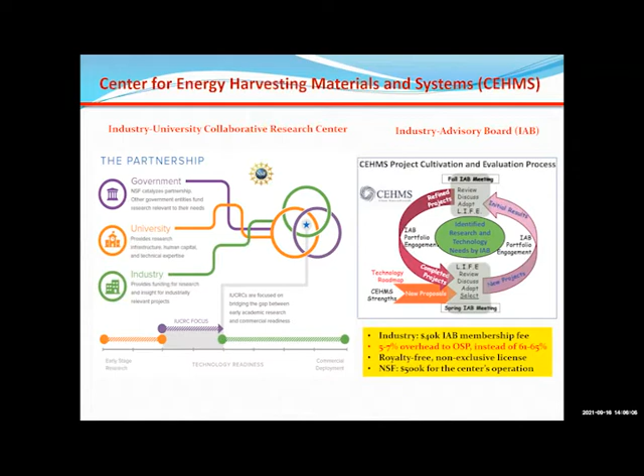Basically, the NSF gave us the operation budget, then we get money from industry, so the university reduces overhead. About my research, I work on energy harvesting from different scales.

Energy harvesting is really applied research, so the knowledge you use includes vibration, dynamics, control, electronics, thermal fluid, and smart materials in sensors.

Today I'm going to talk about energy harvesting from vehicles, transportation, and ocean, used for the transportation system.

First I'll talk about small scale energy harvesting, usually at the milliwatt or microwatt level. I'll give one example about smart tire energy harvesting. Then I'll talk about energy harvesting from vehicles, at the 100 watts energy level.

Then I'll talk about transportation infrastructure energy harvesting, specifically railway track energy harvesting and speed bumps. Then I'll talk about ocean energy harvesting, and finally give my conclusion.

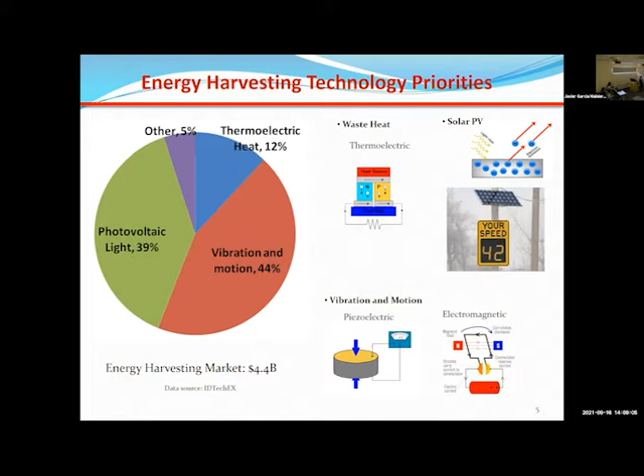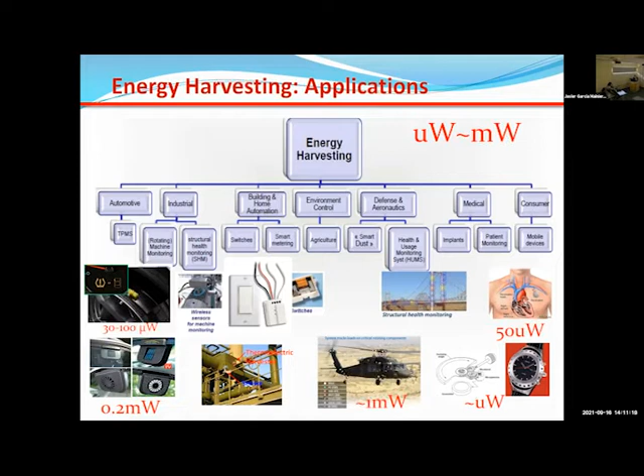This is 100 microwatts or less, right? Like the watch is microwatts energy. Those are the micro milliwatts energy. So that's energy harvesting, the principle.

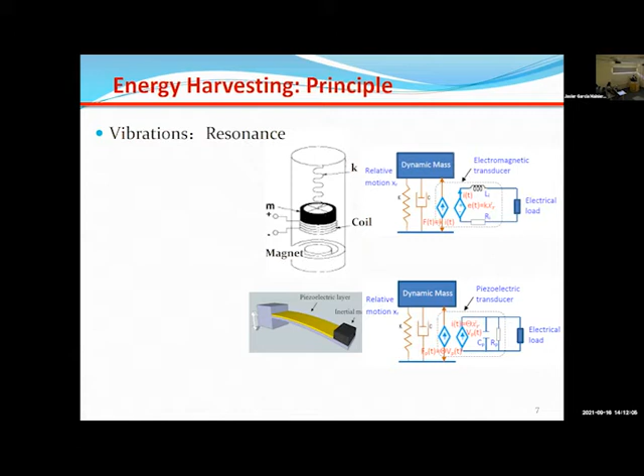Take a look at these two most popular types: electromagnetic and piezoelectric. No matter what, there's a vibration mass. And then there's vibration, and you can model this mechanical vibration with the voice coil or piezoelectric. It generates a voltage or current through this piezoelectric or electromagnetic transducer, and then you get energy out directly. This is the modeling for piezoelectric and electromagnetic energy harvesting.

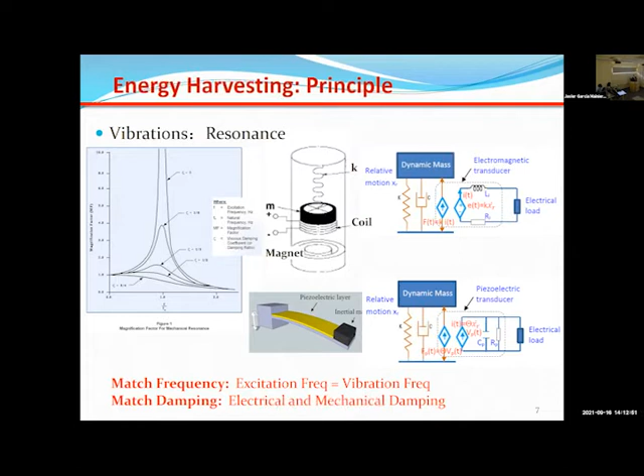And essentially you use resonance. The condition is here: you need two conditions so that you can get energy out. First, you have frequency match. When the system works at resonance, you have maximum vibration amplitude, so you get more power output. Second is damping matching. You need to design the power electronic circuit so that when you charge the system, you introduce damping. The electric damping, or energy harvesting damping, should match the mechanical damping. In that way, you get maximum power output.

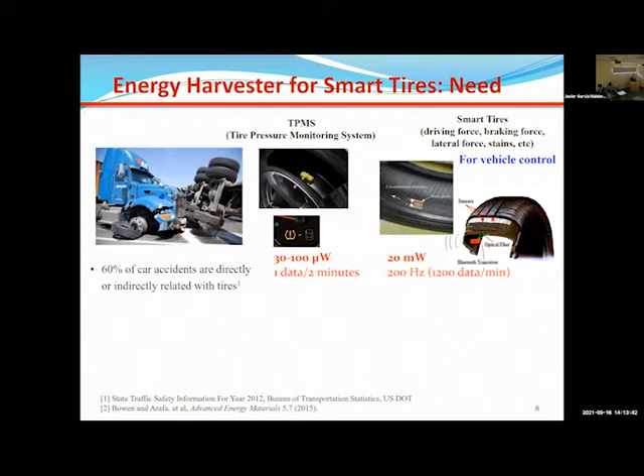So I mentioned small scale energy harvesting for tires. Nowadays all new cars have to put a tire pressure monitoring sensor. The tire pressure monitoring sensor takes one data point every 2 minutes, therefore most batteries last for years. Nowadays for vehicle control, to implement control you usually need 200 hertz sampling. So 200 hertz is 1,200 data per minute compared to 0.5 data per minute. Therefore, if you use a battery, it will not even last for days. What we can do is harvest energy.

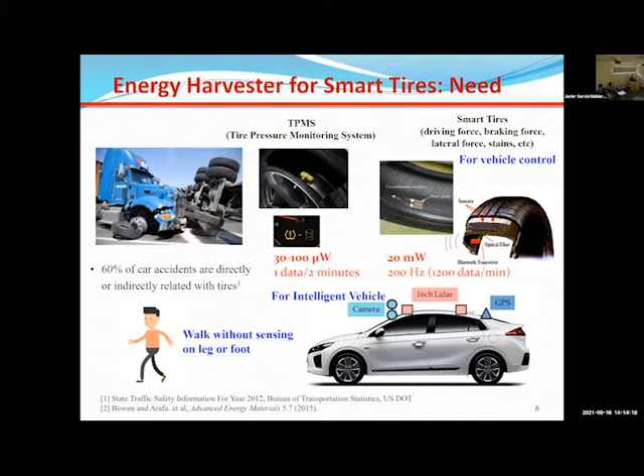Another motivation: think about it this way. Now people talk about intelligent vehicles. They put a camera there and all kinds of sensors to sense the road condition, but you don't have sensors here on the tire. What's that look like? You are walking, you use your eyes, you don't have sensors on your leg. Can you imagine walking that way? You wouldn't walk well, right? So there's a need to power the tire, to get a smart tire. However, a smart tire is not very easy to power because of the implications.

Tire energy harvesting has been a topic since energy harvesting started 15 or 20 years ago. People looked into tire harvesting, but it's very challenging. First thing is vibration. For vibration energy harvesting, you need to create resonance, and in that way you have large vibration. But tire road roughness is more like random vibration, and with random vibration you cannot create resonance. Another thing is you have large centrifugal force on the tire.

You have up to 200 G. At that level of centrifugal force, it wouldn't vibrate that easily. And third, suppose you find the best resonance frequency. However, when you drive the car at different speeds, the excitation frequency changes. So what can we do?

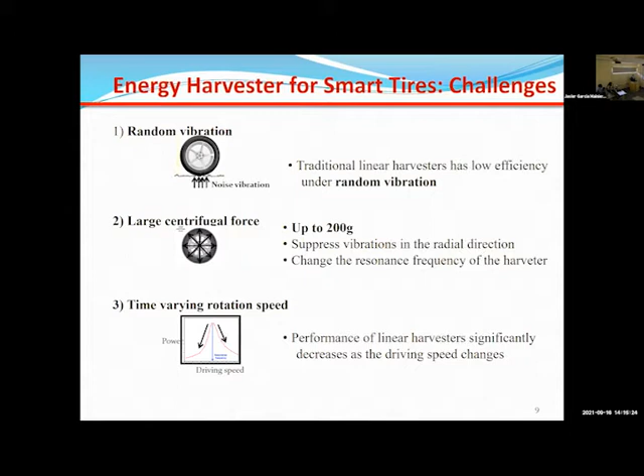So this is the solution: we talk about stochastic resonance before we present our self-tuned stochastic resonance. I would like to mention this background on stochastic resonance.

Stochastic resonance requires three conditions. One is a bistable system. What's a bistable system? You put a cantilever beam in the upper or vertical direction, just imagine that way. Under gravity, this position is equilibrium but not stable - it will go this way or that way. This stable status, this is bistable: one position stable, another position stable. So you need a bistable system.

Second thing, you need noise, using random excitation. Third is a weak periodic signal. If you meet these three conditions, the vibration at a certain frequency suddenly magnifies. That means if you have random excitation, the amplitude is very, very small, but if you have random excitation plus a weak periodic excitation, the amplitude can increase 10 times, 50 times, like that.

So this frequency depends on the stiffness, first order and third order stiffness, and it also depends on the excitation noise. If your noise reaches a certain level, as I said, you suddenly increase the amplitude - that's how it works. Normally, if you have random excitation, it only vibrates at the equilibrium position in a very, very small range.

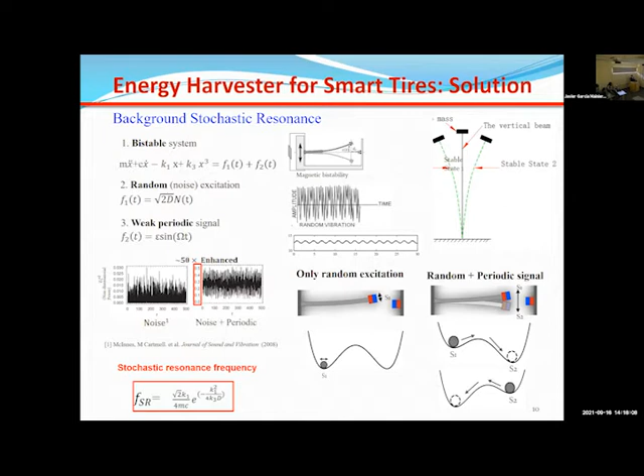So now come back to the tire situation. As I mentioned, you have weak periodic excitation, and you have random excitation from the ground, right? You also have gravity as it rolls over, and gravity changes.

Gravity is just 1 g. Keep in mind, centrifugal force can be 200 g. This is called weight, right? And now we use centrifugal force to create a bistable system.

In this example, this is gravity—makes sense. Backward, you have this stable status, this stable status. Now the gravity becomes centrifugal force, right? You have 200 g. You put a beam here. The beam will not stay here—it will stay this side or another side, right?

So now all three factors: random excitation, and this is weak periodic excitation—this frequency depends on how quick you drive the car—and you have centrifugal force. All three factors become three good factors. So we create a stochastic resonance.

More important is self-tuning. What does self-tuning mean? This buckling depends on the rotation speed, right? So you wouldn't be surprised that you can tune the stochastic resonance at different rotation speeds, different tires, different vehicle driving speeds.

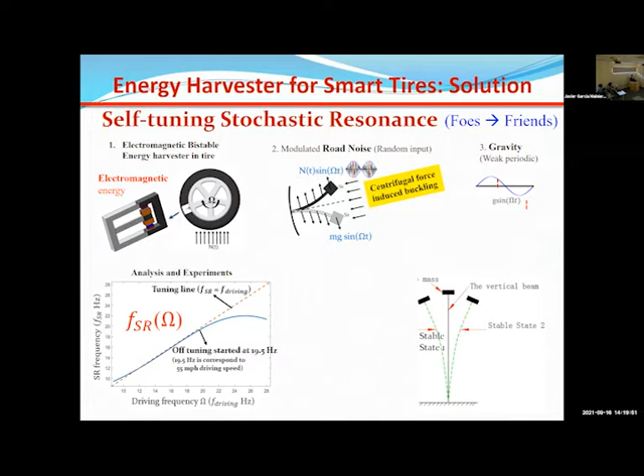So we created this prototype and mounted it there. Let me show you this small video. This is the vibration, and this is the electromagnetic component we put here. After that, we mount it to the tire and drive on the road. So this shows you what happened.

So we recorded the result. Instead of only what a tire pressure sensor needs—100 or 30 microwatts—we get 10 to 20 milliwatts, in a very, very large range. In that way, we can enable the smart tire.

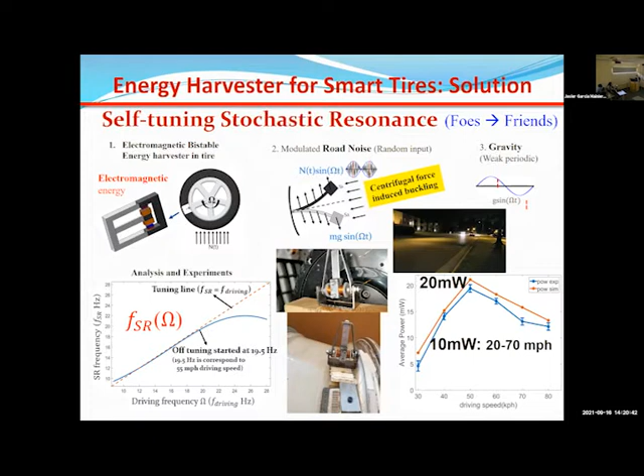Okay, so this is small-scale energy harvesting. When I came back to university in 2008, a lot of people already worked on energy harvesting. So I wanted to work on a different, large-scale energy harvesting. The small-scale energy harvesting is just a vibration problem, linear or nonlinear. Large-scale energy harvesting is unique.

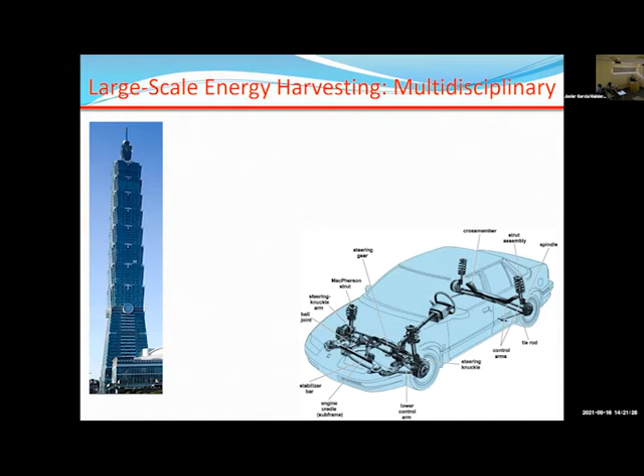Like in civil engineering, tall building vibration—that was my first NSF project. Another thing is vibration from the suspension system. What's unique is—let's take a car as an example.

You must have a vibration source. You need to understand road roughness—this excitation. You need to understand the vibration mechanical system. This vibration frequency is usually low, 1 to 10 hertz. And you need motion magnification or a transmission, then a transducer—piezoelectric, electromagnetic.

Now we are talking about 100 watts of energy. You need to figure out how to integrate it into an energy storage device, right? More importantly, for something like a car suspension, your priority is not to harvest energy—your priority is to reduce vibration. Energy harvesting is a secondary benefit.

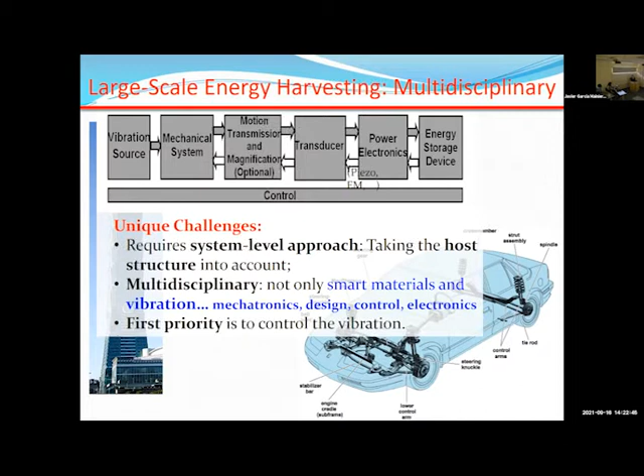What I mean—to summarize the unique challenge—we first need to consider vibration reduction, then energy harvesting is a secondary benefit. Second, it's not just a vibration system; we need to think about the transducer material, the mechanical system, and design control electronics. We need to take a system-level approach, not just vibration itself.

For myself, I have all the background needed for this multidisciplinary research. I had my bachelor's degree in vehicle engineering, and I also have a double E degree dealing with electric circuits. I developed some circuits like that.

When I was in graduate school, I worked on vibration control—this is my master's thesis work, and this is my PhD thesis work. I worked in Chicago for 4 years at a pharmaceutical company, where we developed a robotic system for pharmaceutical R&D level automation.

So I have the background of vibration control vehicle design. I think I can create a new area in 2008, that I can do better than any other people in the field who already work on that.

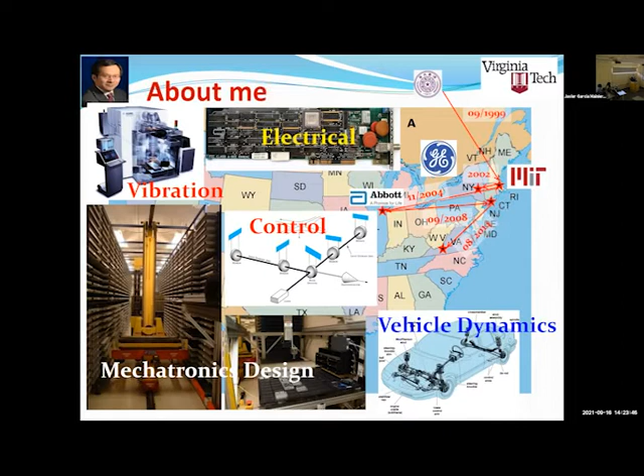So this is not just energy harvesting. I apply this for the tall building, as I mentioned, and I also apply this for the transportation system, like a vehicle. Nowadays, vehicle and transportation more and more interact together. It's not like DOT only focused on transportation, DOE look into vehicle, right? Now DOE also look into the infrastructure, and DOT also looks into the vehicle.

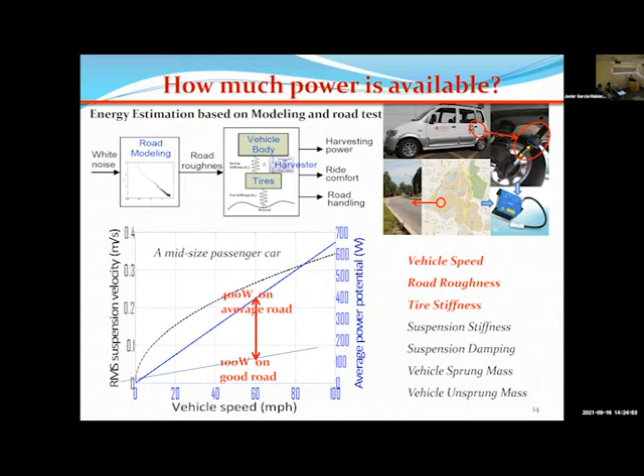So how much energy is available? We did some modeling work, taking road roughness into consideration, vehicle dynamics into consideration. The conclusion is, on a good road, we can get 100 watts from the car, and on an average road, we get 400 watts. The most important factor is vehicle speed. You drive faster, you feel more bumpy. You have rough road, you vibrate more. You pump air into the tires, you have a bumpy feeling, you feel more vibration. All these three parameters dominate how much energy you can harvest.

So what do 100, 400 watts mean? This is BMW's data, the BMW 530. For this car, when you drive on the road, using the New European Driving Cycle, you can remove all the unnecessary electronics. In such a case, it consumes 390 watts of electricity. This electricity is provided by the alternator, which corresponds to 4% fuel. What I mean is, if you have 100 to 400 watts of energy, you can increase fuel efficiency by 1 to 4%.

So if you consider we have 250 million vehicles, the total energy you can harvest, the energy saved per year, is more like 10 billion. Depending on which kind of car, truck or bus, and how much you drive, you can get payback time in 1 to 2 years.

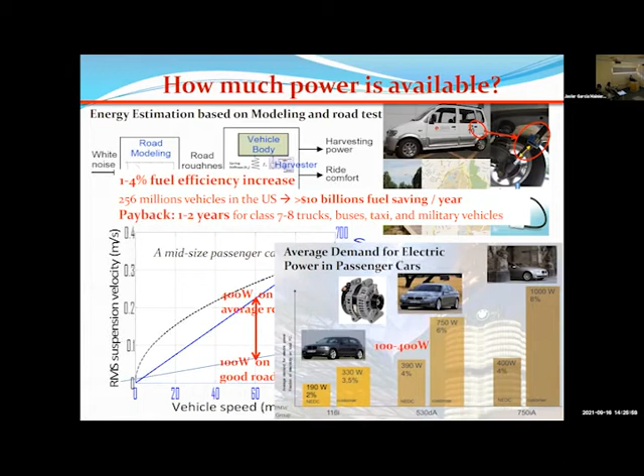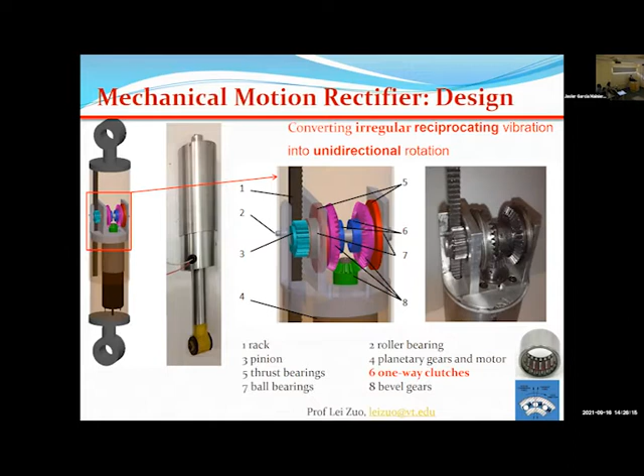Okay, so how do we get energy out? This is one design we implemented. I call it the mechanical motion rectifier. It looks like a rectilinear system, with some special setup. Let me show you this video.

Look at here, and see what happened. This shows two motions, rectified up and down, and your generator rotates in one direction. There's a one-way clutch in between. In one direction, this one-way clutch engages the drive here. In the other direction, this one-way clutch engages the drive to the generator in the same direction. That way, no matter how your suspension moves up and down, the generator always rotates one direction. So this is called a mechanical motion rectifier.

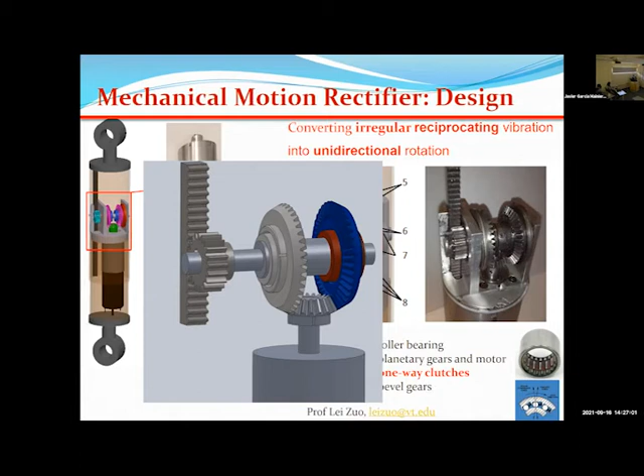As you know, it's a vibration system. We generate a vibration-type signal with a positive voltage and negative voltage. Then you need a rectifier to change it to DC, then you store it into the energy storage, like a battery. Now, if the generator rotates in one direction, you don't need the electrical components, you can generate DC directly. But our advantage is not just rectifying the voltage.

In principle, it's analogous to the electrical voltage rectifier. An electric voltage rectifier takes AC voltage, and generates output that most cell phones and computers use, DC. That's what's inside, AC to DC. There are two important components to consider: a semiconductor diode, which allows current to go in one direction, so previously it's AC, now it becomes DC. And there's a smoothing capacitor which makes the voltage stable.

Now, in the mechanical domain, we have a one-way clutch. This allows motion to go in one direction. You use a one-way clutch probably every day, like in a bicycle gear. And when you drive the car, your engine starter, the motor can drive the engine, but the engine cannot drive the motor. There's a one-way clutch inside. Then the flywheel can stabilize the rotation.

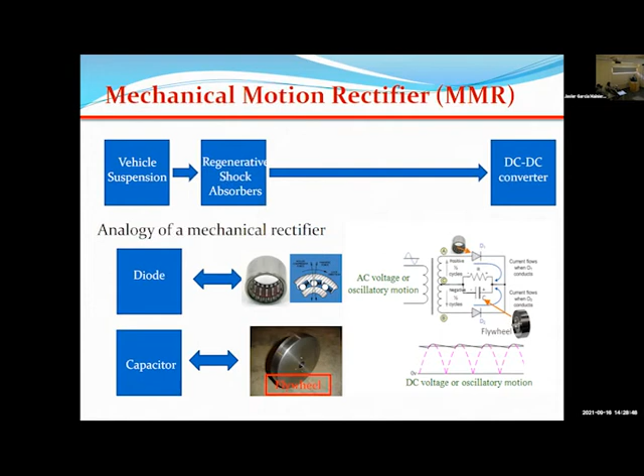So the advantage is high efficiency. Previously, the generator was in oscillation; now the generator always rotates unidirectionally. Another advantage is high reliability, because now the generator rotates one direction, you don't need to worry about impact and backlash in the gear space, the gear engagement and disengagement.

So you also get better vibration control. And that means, usually, let me put it this way, as a control engineer, you can imagine that with a large mass, usually you cannot drive the system too quickly.

This inertia is a problem. Now inertia will help us. Inertia rotating in one direction acts as a flywheel.

So here is the road test result. We put this in the suspension, and we drive on the road. You can see with 2 to 4 millimeter vibration, we get 15 to 100 watts from one shock. And there are 4 shocks, right?

As you'd expect, when you drive higher speed, this is a very low speed, 15 miles per hour. At a higher speed, you have higher power. You get more than 200 watts.

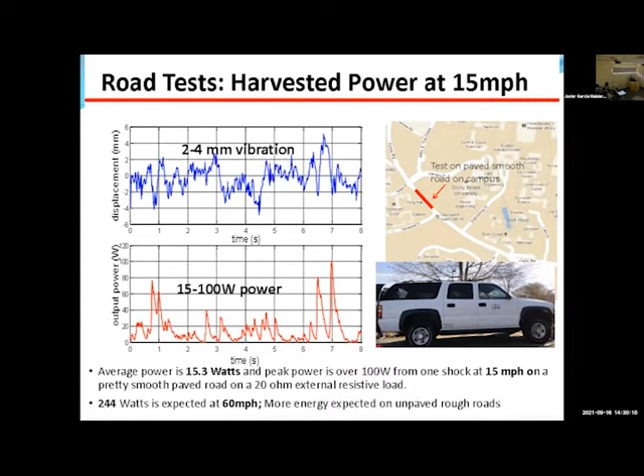So another thing I mentioned for this energy harvesting is that our priority is not to harvest energy, right? When you talk with the automotive engineer, they always ask, can you replace my car shock absorber and get better performance? The answer should be yes. Let me show you why.

Let's look at the experiment result first. This small truck, we put our shock absorber there and drive on the road. There are 3 different colors. The red line shows the result without the shock absorber - I just disconnect the shock absorber entirely. Then the green line shows the OEM existing oil-type shock absorber.

It shows the energy dissipated, right? The blue line shows the energy of our shock absorber. We measure the acceleration here. You can see with our own shock absorber, the acceleration and vibration amplitude decreased.

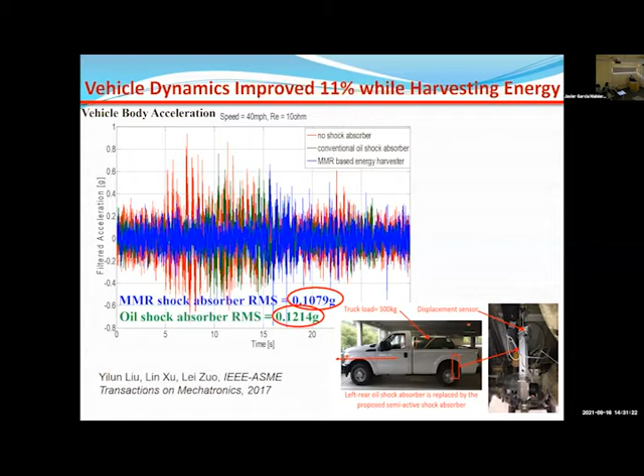So what's the reason? The reason is on the dynamic side. When you harvest energy, when you take energy out, it has a damping effect - the damping. Another thing is, in this system, we have motor rotation.

You have what they call an inerter. What's an inerter? That's a J-damper. The inerter has been used in F1 car racing since the 2000s. This company treated it as secret, and they always had very good performance. Later in F1, people realized there was a ban - you cannot use this damper in race competition.

So the inertia works like that - it generates force proportional to the relative acceleration. It's not F equals ma. You don't have a force proportional to the absolute acceleration.

It's like that when you drive the shock absorber, the flywheel or generator rotation inertia, right? When you have acceleration, the flywheel or generator will accelerate. So this is the J-damper effect.

And the third thing is a nonlinear effect, because you have this linear rotation in 2 directions, you convert into 1 direction - this is called a nonlinear J-damper with damping. Therefore, if we design these parameters, you can control the vibration of the suspension better.

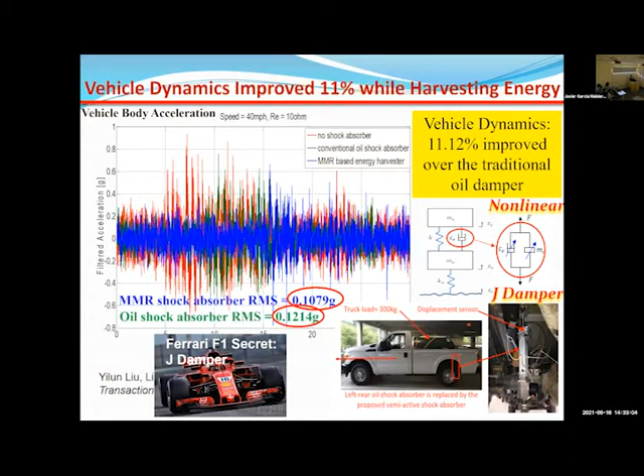So this is energy harvesting from suspension. In one conference I attended, this is CRRC - during the conference break, I met one person from CRRC, China Railroad. They said, can you use that for railway transportation?

And he invited me to visit the company. His reason is, just imagine that way, the railroad, each segment, right? Usually freight trains have no electricity. So people talk about intelligent smart transportation, but each part doesn't have electricity - how can it be smart, right?

Half a year later, they find it out, but they already paid the compensation for the loss. Anyway, they wanted me to develop something to track each car. So it's a freight train, and we did that. We put our shock absorber there to harvest energy.

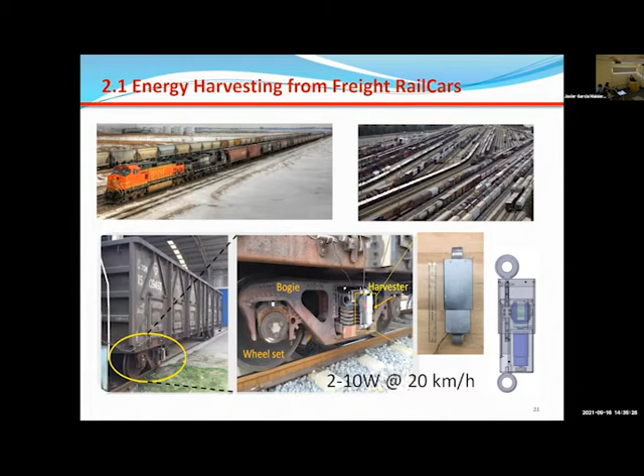So this energy harvesting from vehicle side, I want to talk about energy harvesting from transportation structure. Like a steel railroad, right? Another railroad in the tunnel or on the bridge in the remote area, it's really hard to power. On the track side, there are a lot of different devices - signal lights, hot box, gate crossing, wireless communication, structure health monitoring - all of this needs power. So now we want to provide a solution to power the railway track.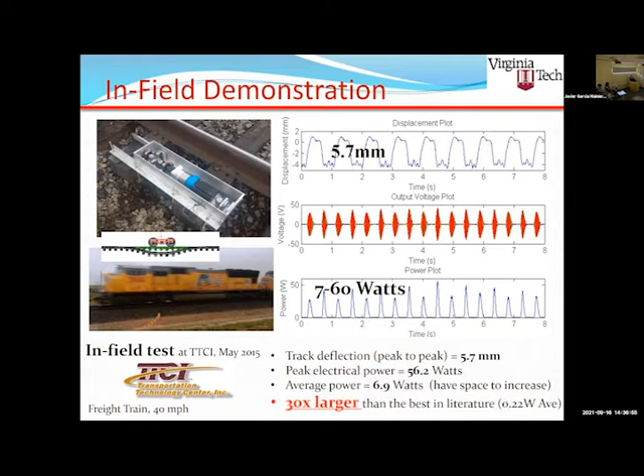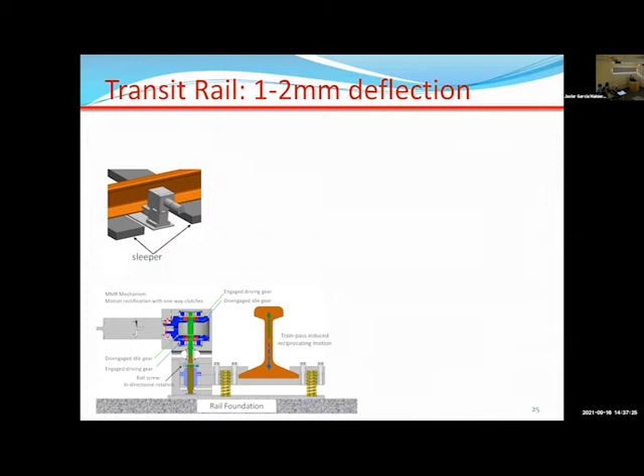Another thing is transit rail. Transit rail usually sits on sleeper concrete. In this type of thing, the vibration is very small - instead of 5.7 millimeters, this is just a couple millimeters. So in this one, we have another design. Instead of mounting our harvester on the tie, we mount our harvester on the track directly. This is the design, and also this is the test. I will show you a video.

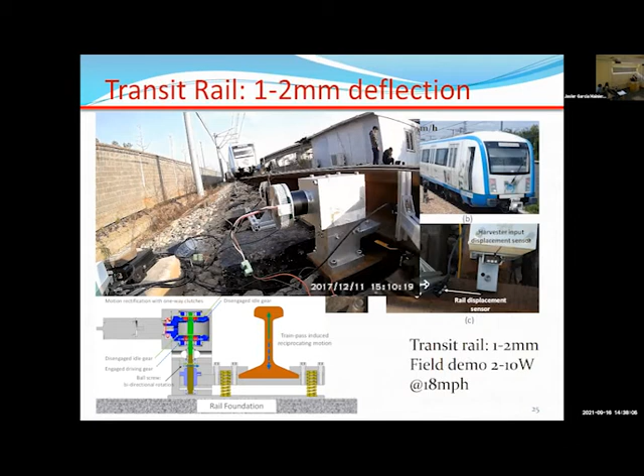This is a little bit slow. This is a generator here, mounted on the track. When the train passes by, the generator rotates and we have energy. This one we get about 2 to 10 watts of gain.

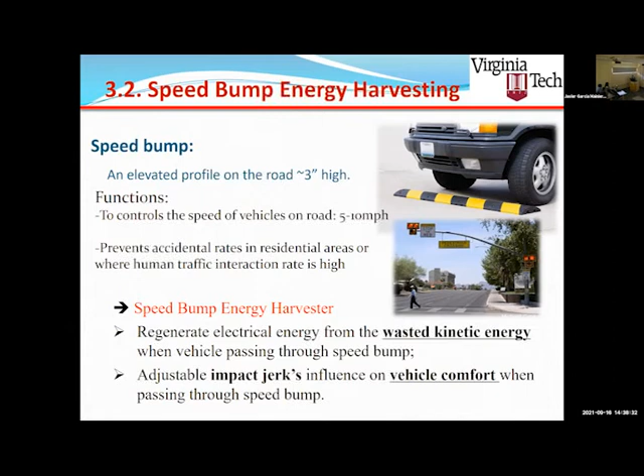Another work we did is speed bump energy harvester. Like in a neighborhood you have speed bumps, even on the highway you have toll booths, right? You need to slow down the traffic, so we can harvest energy from the speed bump. This prototype we developed moves up and down, and this generator is inside. So this test, this speed bump here, we just used a wood track. We built that, just drive the car. This light we can light up.

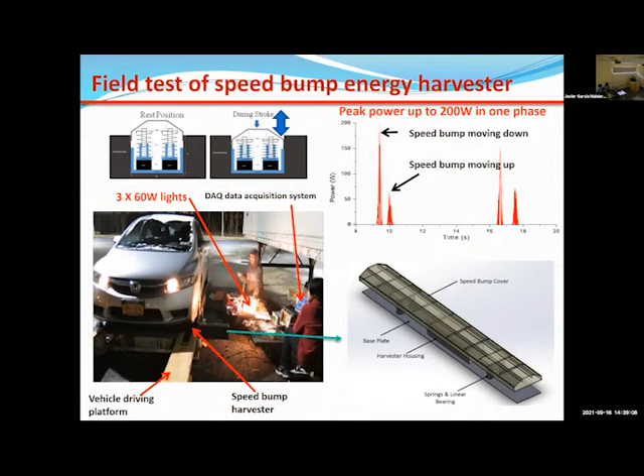So this is one phase we get 200 watts. Later we improve the design, we can get up to kilowatts of energy from the speed bump - that's the peak energy. We also have energy from the pavement, it's like something you put on the road. When you step on that, you have energy.

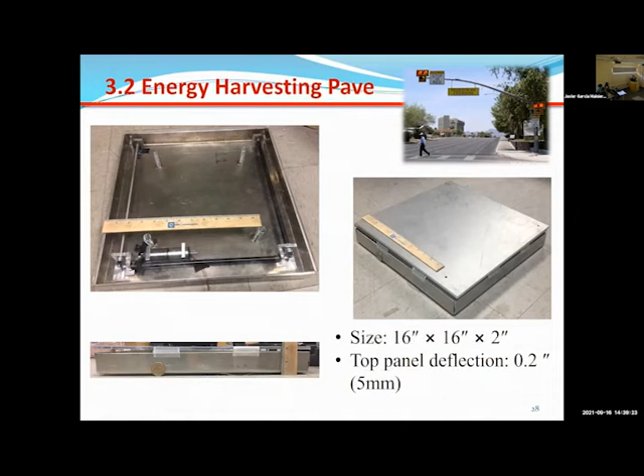So another thing, on-road energy harvesting. You want to build a smart transportation system - just imagine the way you put a harvester on the road. I know Texas, California, and New Jersey support people putting piezoelectric on the road. Here we build a box, electromagnetic. Piezoelectric gets you milliwatts energy at peak. In this experiment, we drove the car 2.5 miles at 10 miles per hour, and we can get up to 20 watts energy from the energy harvester on the road.

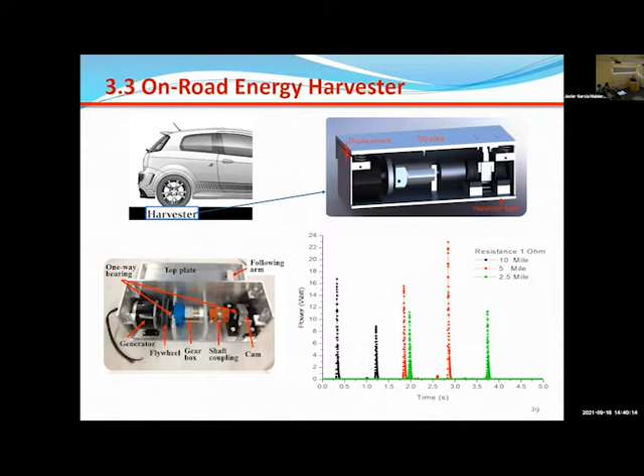So this is the test. You can say you step on that, you get energy harvesting.

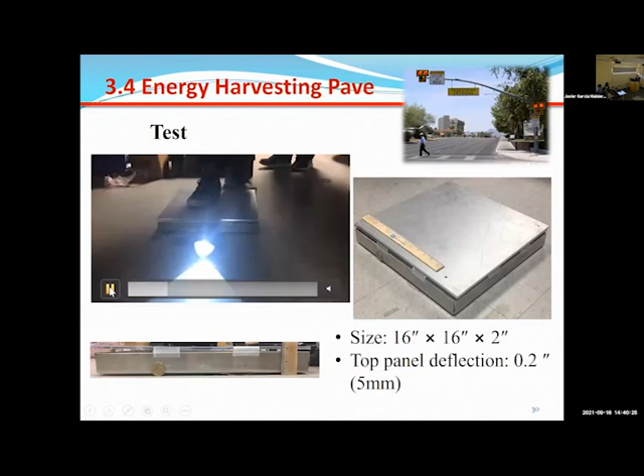We also get energy harvesting from shoes. You put it inside, like an insole, and you walk, you can get energy harvesting. Just imagine that way - if you have this type of thing for the roadside highway speed walker, you can harvest energy from the shoes. Then this shoe energy harvester can send data to the car, making the transportation system safer.

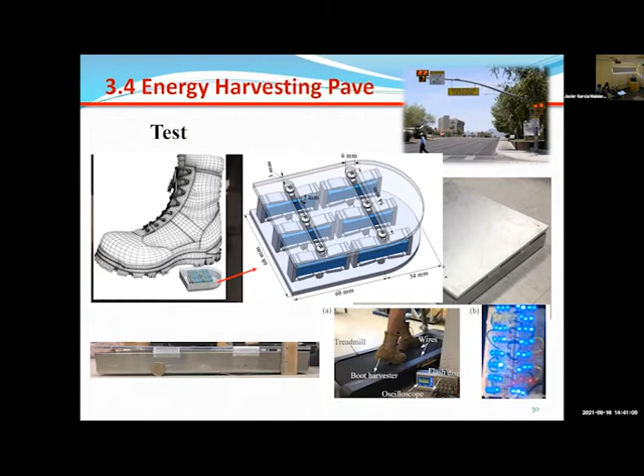I want to briefly talk about marine energy harvesting. It's a little bit off topic, but it can still be used for transportation systems or autonomous vehicles. This is just one example - like a fish farm, you can have energy to power the underwater robot to clean the fish farm. That itself can be a robotic system too, like a boat - you can navigate it to a place with high ocean waves, get energy, and come back to the fish farm to power the system. We just got one project from NSF National Robotic Initiative for this ocean-powered robot for autonomous fish farm.

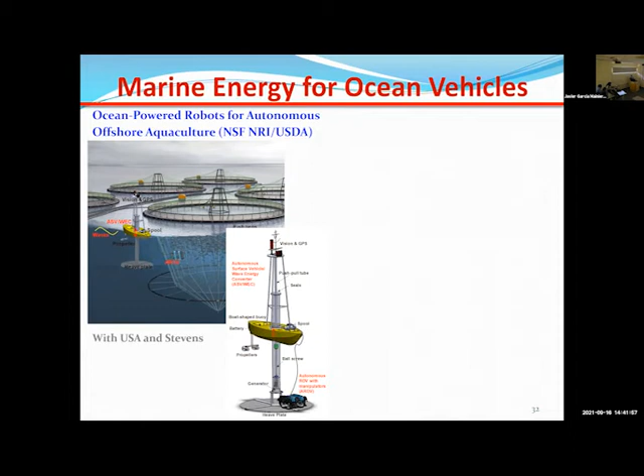Another idea is moving from marine energy to hydrogen. In marine transportation, 70% of goods are transported by ship, so it consumes a lot of energy. One way people are looking into is electrifying this type of ship, using hydrogen to power it.

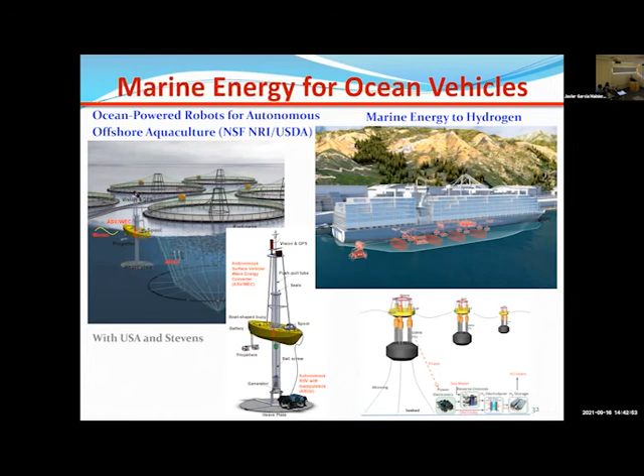Hydrogen usually is used to split the water into oxygen and hydrogen. Just imagine that way. Now you can build energy harvesting from the ocean. You can produce hydrogen when the ship passes by, and you can recharge the ship with hydrogen, right? So energy harvesting is challenging, but the energy is there in the ocean. This is called blue energy, okay?

And the blue energy comes from this map, okay? This is blue Earth, right? So blue energy, typically we say there are 3 types: ocean wave energy, tidal energy, and ocean current energy. Broadly speaking, it also includes river current and ocean thermal energy, offshore wind energy, and marine biomass.

So take ocean wave energy as an example. The total power density is very, very large. The power density compared with solar is 10 times larger. And the total potential along the U.S. coastline, the wave energy is two-thirds of electricity generated from all resources. The first patent was 200 years ago.

But now, if we say ocean wave energy, you don't know what kind of ocean wave energy it is, right? It's not your fault, it's our fault, because we haven't developed ocean wave energy converters well yet. So far, there's no research convergence. It's pretty challenging, and there are several challenges.

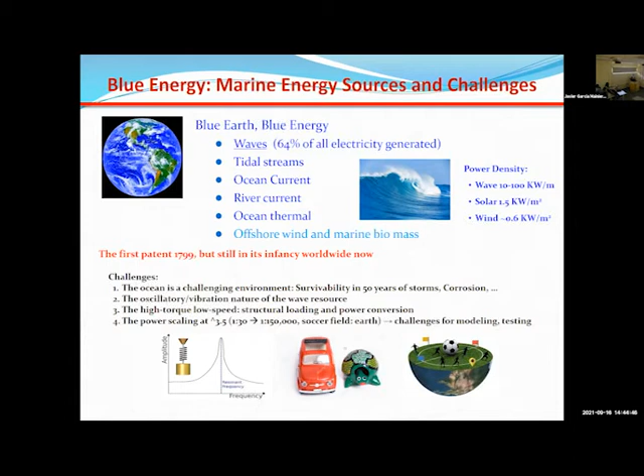One is vibration. The wave is kind of a vibration. If your frequency shifts a little bit, the output can significantly reduce, right? It's sensitive. Another issue is the vibration and the frequency changing. And another thing is the amplitude - the wave velocity is still very, very slow, like 1 meter per second. If you need power output, remember power equals force times velocity, so you need a huge force. This makes the system pretty challenging.

So that's why there are different types of wave energy converters in the literature, and so far no one knows which one is best. There isn't even a widely accepted criterion to judge which one is best.

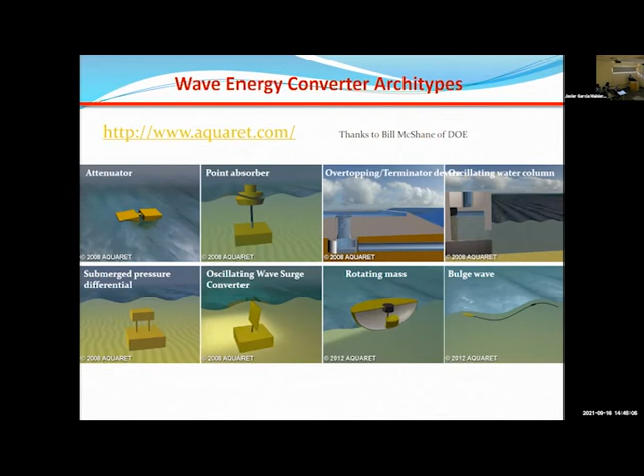So I came back to university in 2008. I mentioned I worked on car suspension, building that type of energy harvesting first. So in 2016, and back in 2008 - the United States DOE first supported the first proposal, solicitation in 2008, first proposal in 2009, on the ocean energy side. 2016, they set up the Water Power Technology Office. 2019, they finalized funding for the blue economy.

So after that, I worked 2 years on that kind of energy harvesting from cars and buildings. I said, okay, it looks like there's a lot of similarity - the vibration frequency is almost the same, the amplitude and structure are similar, and the wave motion is almost the same. So I turned my research to the ocean wave side.

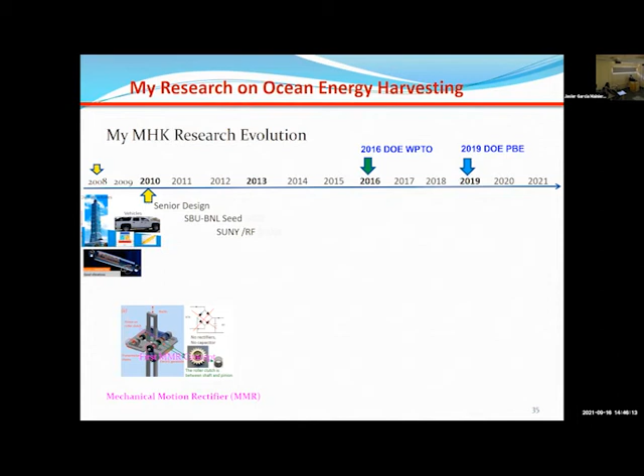Through senior design, we built a motion rectifier. Later, we got better funding to work on all kinds of wave energy converters. And then we also worked on the so-called blue economy - at that time, there was no such term yet. So basically the idea is to harvest energy for in-ocean localized applications. So this is my work on the wave energy side.

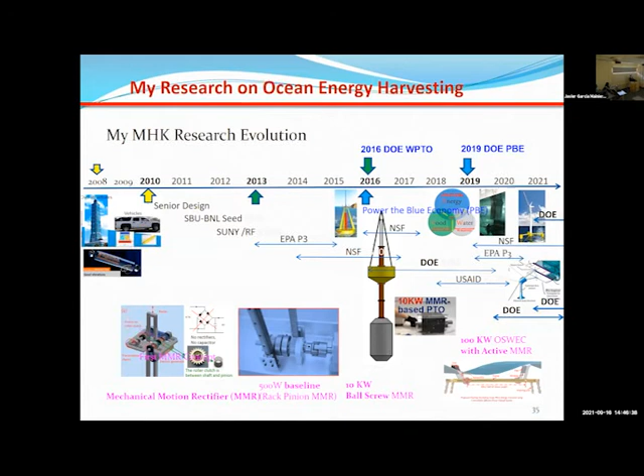I'll quickly show you 2 project results, and this is the video. So this buoy moves up and down, you can see the energy harvesting, right? And what's inside? This moving up and down drives one generator. I'll show you this video - please pay attention to the generator.

So this is the generator, okay. The generator rotates in one direction as this moves up and down. This is the motion rectifier, another version, okay. That one has pretty high efficiency - we get more than 80% efficiency. The design follows the same principle, but it's a different configuration.

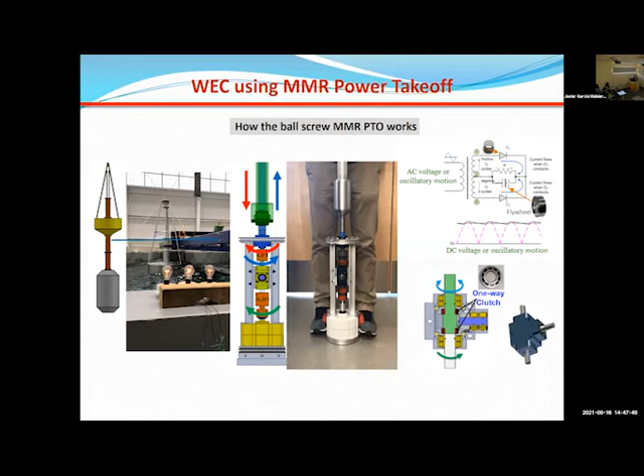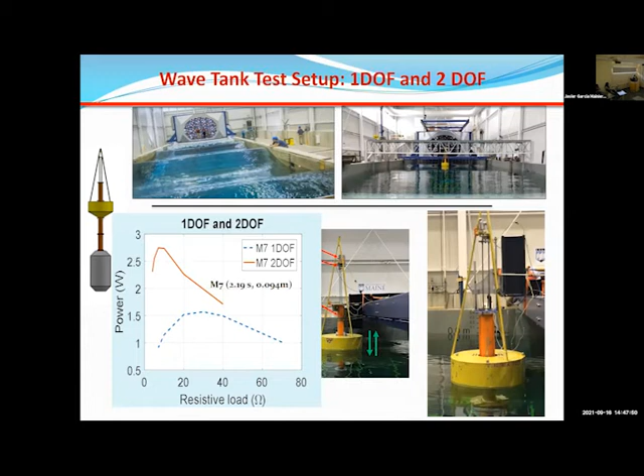Okay, so we tested that in the wave tank, and we have a different design. We consider the hydrodynamic side, so we also did a scaled-up 10 kilowatt prototype. We consider the structural dynamics, wave-structure interaction, and the mechanical design. We also designed power electronics for grid connection, and we tested it in the ocean.

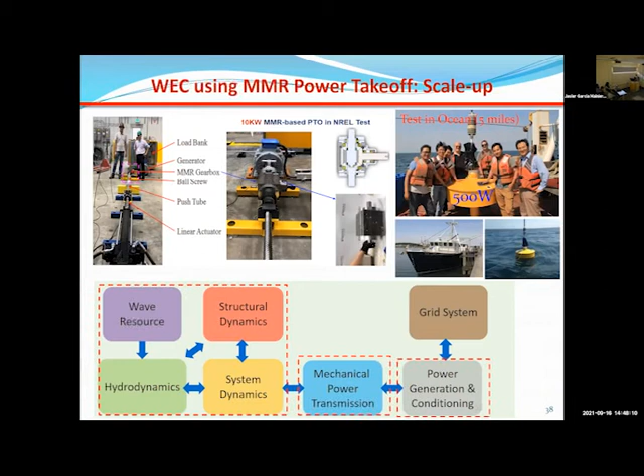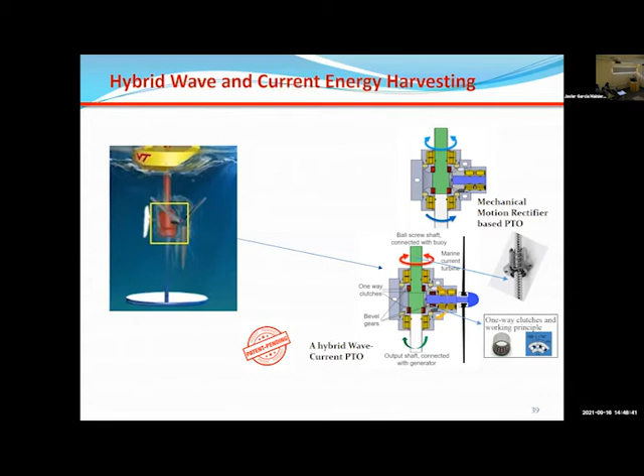Okay, so this is the key innovation part, the motion rectifier, and this figure shows it's almost the same, right? The only difference is you have another turbine here. Another difference is this red part, which is a clutch. So in this design, the wave can drive the system and the turbine can drive the system at the same time - the wave and tidal mechanisms will not fight each other. This is the result.

So this wave drives the same generator, and the turbine drives the same generator. We can get more power. So this is the result we show you.

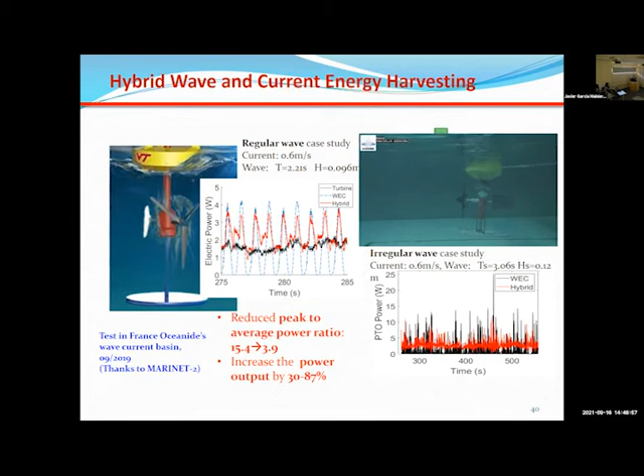I mentioned to you that we have a mechanical rectifier. The problem is like when you ride a bike, flat road is not a problem, uphill is not a problem. Downhill, what happens? Your bike loses control, right? You don't have brakes. It would be too dangerous. Same here, we use a one-way clutch. The wheel can drive the generator, but the generator cannot drive the wheel, similar to how your pedal cannot drive the bike.

So in the electrical domain, people replaced this passive diode with an active transistor. That is the synchronized rectifier. With synchronized rectifier, the current can go two directions, not only from the input side to output side. Now the energy stored in the capacitor can draw back.

So in the mechanical domain, we also create this kind of system, and I haven't shown you this video yet. We have a prototype here. In this prototype, this is the active motion rectifier. Basically your generator always rotates in one direction, but you can use this generator to control the input side into two directions of motion.

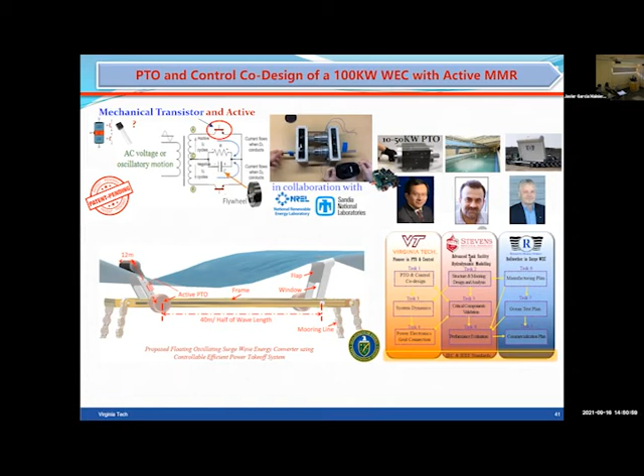This is another project we are working on, with Dr. Hajj and his students. PI works together with a company. This wave surge device, instead of moving up and down, uses rotation. The uniqueness is we have an active motion rectifier so that we can implement active control. This is in collaboration with the National Lab. I will show you a video.

So that is what we tested in the tank at Stevens. We have two flaps, left side and right side. The two flaps moved out of phase. Since the flaps were out of phase as a result, the forces were cancelled in the horizontal direction, otherwise the platform would move.

We also did an experiment with one flap only. With one flap, this flap doesn't rotate, they just move together on the left and right side. This is a 100 kilowatt wave energy converter with active motion rectifier.

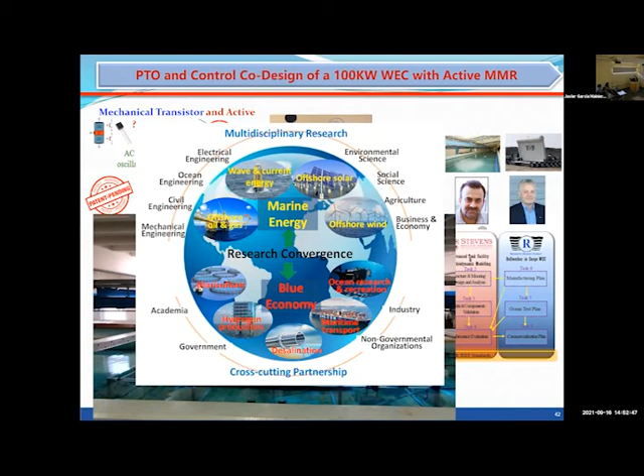So I want to draw the conclusion with my vision. Overall, I talked about energy harvesting from vehicles, from infrastructure, from sustainable ocean sources, to enable sustainable and intelligent transportation. There are three research directions we talked about. One is smart tires and on-road energy harvesters, where we have small energy that we use for intelligent transportation systems like Internet of Things. The second thing is 100 watts of energy, like the suspension system, or bridges or buildings, where we have the energy to implement vibration control. The third thing is ocean-type energy harvesting, which involves different disciplines. We want to make a breakthrough and contribute to a global energy solution.

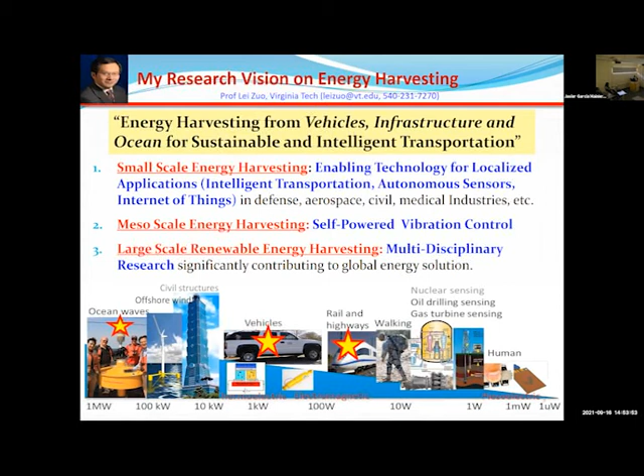Now you use a camera to do some analysis and to detect things. Why not use an energy harvester to power roadside infrastructure? You can use wind energy, solar energy, vibration, to charge a battery. You have energy, you can power wireless communication and send data to the car. The car itself doesn't need to use a camera to look at pictures - the infrastructure directly tells you okay, turn left, turn right. So this is the self-powered active infrastructure.

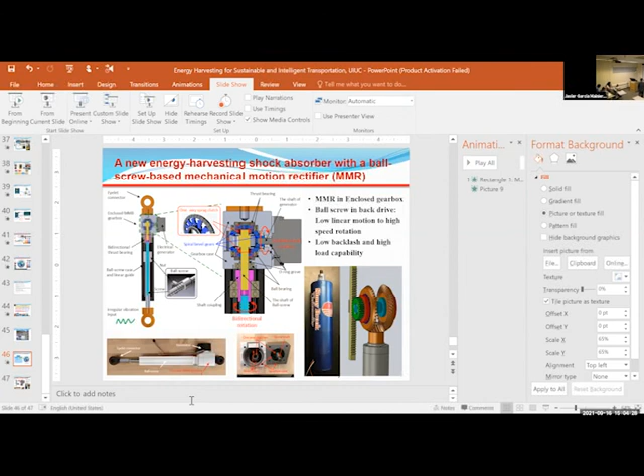Let me say that we looked into that. Usually for a transportation system, you don't need too much power, and the communication, like cell phone, depends on what kind of wireless network you use. If you use Bluetooth, it's very small energy, milliwatts, 50 milliwatts. If you have a cell phone tower, you usually need about 1 watt of energy. So if you dissipate the energy, even if you continuously use energy, let's say in a 1%, 2% duty cycle, because the cell phone doesn't need to transmit data all the time. We did some calculation, I couldn't remember exactly, but the calculation was: in 1 week with no wind and no solar, how much energy we need.